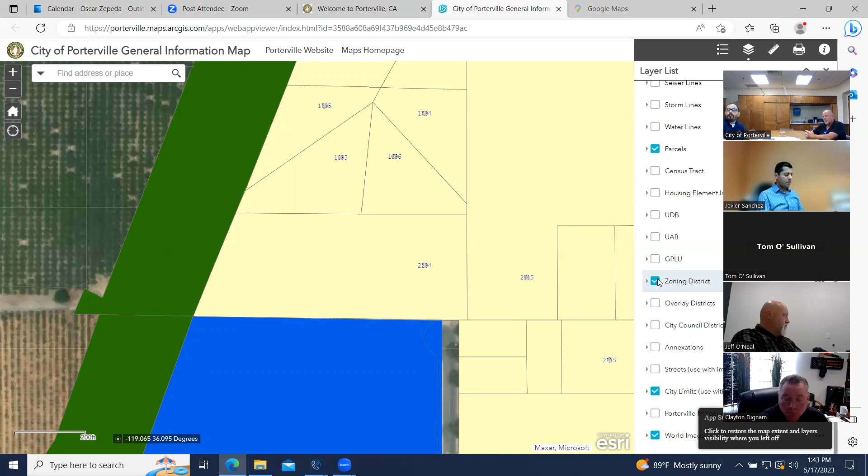It is our understanding that there's been a parcel map approved for the property through the County of Tulare, which subdivided the existing 4.87 acre property into 4 total parcels. The property is within our urban development boundary and is adjacent to the city limits to the south. We have the property pre-zoned as RS1, our very low density residential zoning, with a general plan land use of low density residential.

As far as the process for city municipal services, the city does have an application for that. To receive those services, the property would have to go through an annexation application, as outlined in the city's policy and procedures established under resolution 74-2014 and 75-2014, and amended under resolution 19-2016. Such connection cannot be made unless the city authorizes an annexation and/or processes an extraterritorial service agreement pursuant to the city's annexation and municipal services policies. All water services connections shall comply with all applicable codes.

As far as the annexation area, if you were to proceed, we did reach out to Tulare County LAFCO and received support to include just the subject site of that project area. As far as fees associated with annexations, it will be considered a minor annexation. The fee for the city's process is $1,835, and of course there's also LAFCO's process, which has its own associated fees.

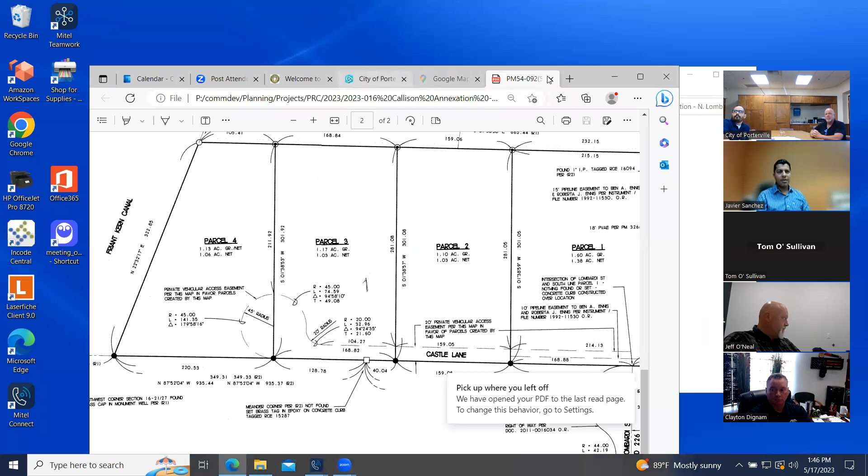Sewer is also available closer to the south end of the school, and that would need to be extended to serve those properties. Because of the parcel sizes and potential units that can be built, in addition to talks with fire and refuse about emergency and refuse vehicle access, we would need a wider vehicular access than shown on that map. In essence, it would need to be a city standard street, which requires a 56-foot wide right of way.

And those improvements that go with it, so curb, gutter, sidewalk, street lights, and those can be developed as each building permit is pulled, except that turning radius, if they're not done close together, that bulb may have to be redone a few times if they develop in order, let's say parcel 2, then parcel 3, then parcel 4. But the improvements could be done all at once as well, so we can just see how that phasing goes. But other than that, that's what engineering has on this project.

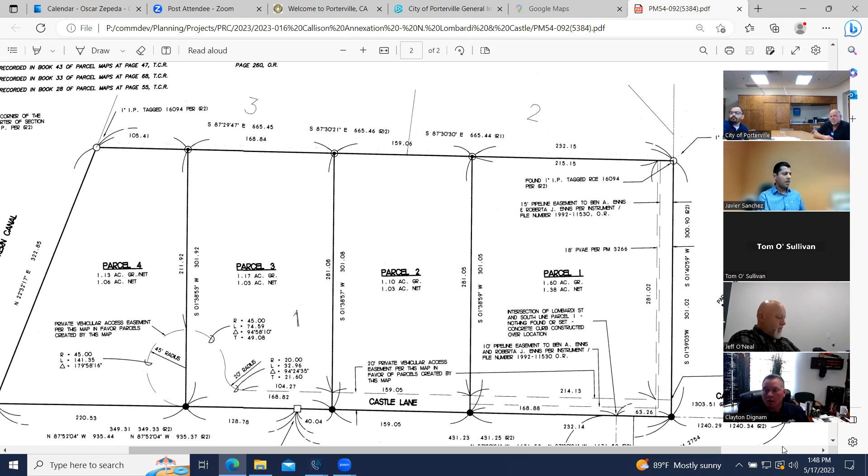Next with the fire department, with Fire Marshal Clayton. Just mirroring what Javier said as far as fire department access. Again, the fire department really has no comment for the annexation portion of this or connection to the city services. It's basically that we will be reviewing these as they are developed and the requirements at that time, depending upon what fire code is adopted.

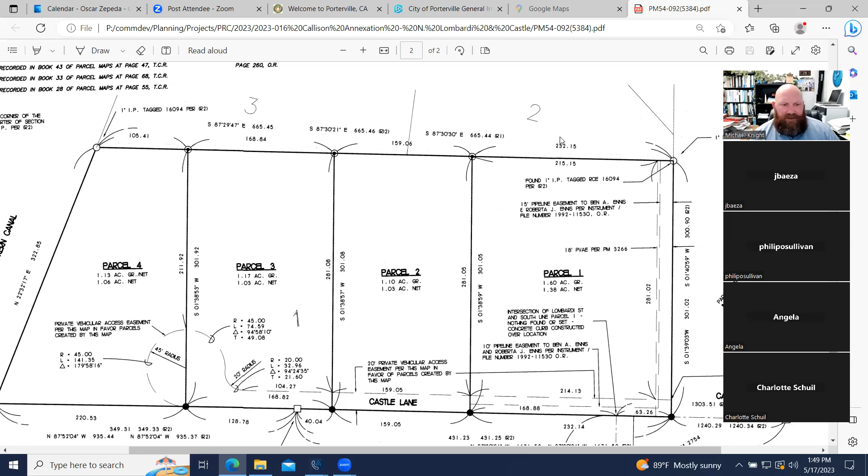No comments this time, no objections to the annexation or the service. Just we would review the connection point and service lines extended to the service addresses, and then continue to review the development of access for refuse vehicles.

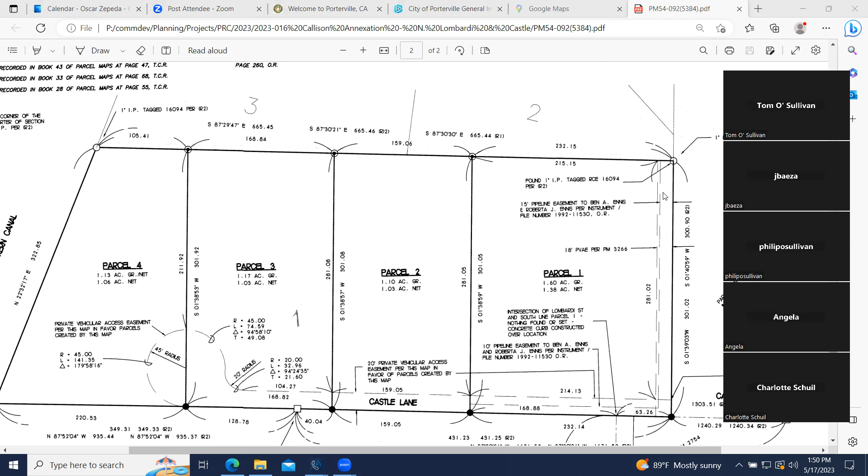I mean, really we want the county, right? You didn't want to get annexed into the city? No, we don't want to be annexed in. We just want to be able to put the wells in. That's our biggest thing. It's already got an existing well there, and everything outside of that, including the houses right behind it, are all county. So we just want to be able to put three additional wells in on the property.

On each lot, each new lot, yeah.

I guess I could speak to that a little bit, if you're asking for a response, I see the blank stare. So I would just acknowledge, as the permit comes over from the county, in this request, the city would not issue a will-not-serve letter. The city would be willing to serve, contingent on meeting the project requirements.

Couldn't quite hear him. Yeah. I'm not gonna give you a will-not-serve. My hearing is not the best as it is. But that—you want to repeat that, Mike? Yeah, no problem, I didn't realize the speaker had died in the room.

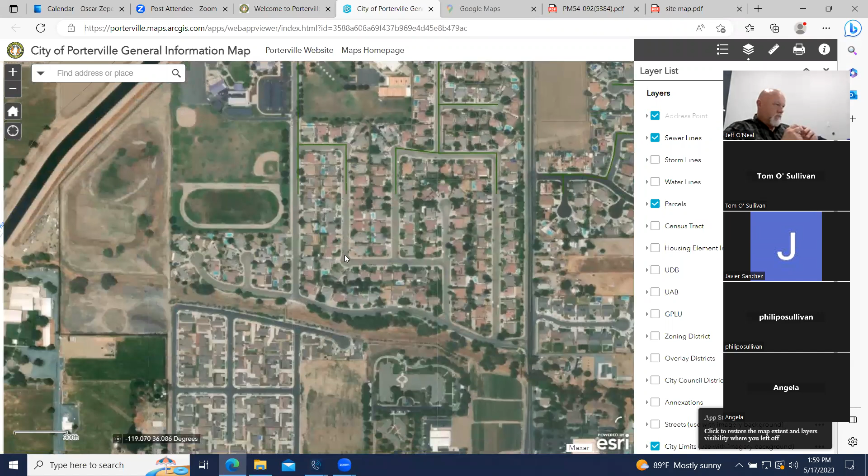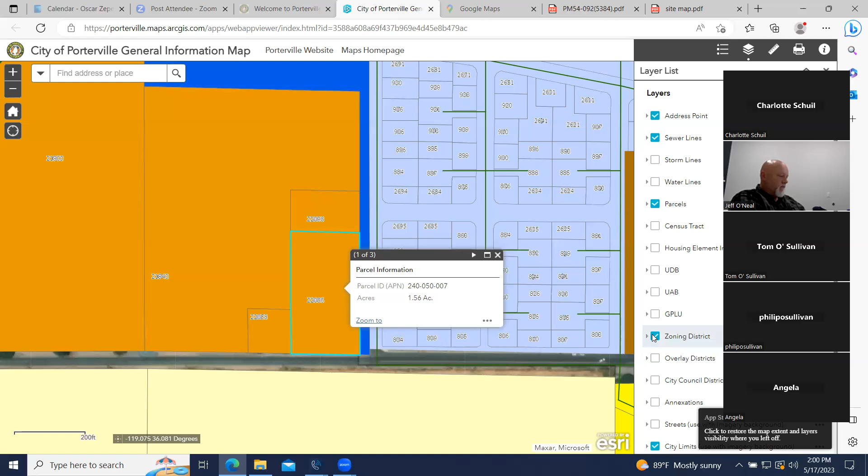Okay, I'll start with planning's comments. Similar situation here as the previous project - the property is outside city limits but within the city's urban development boundary, located at 22086 Avenue 160. The applicant is requesting the process and procedures for annexation of the property for future development of a community water fill station. The subject site's pre-zone designation is medium density residential, and it has a general plan land use of commercial zoning, specifically neighborhood commercial.

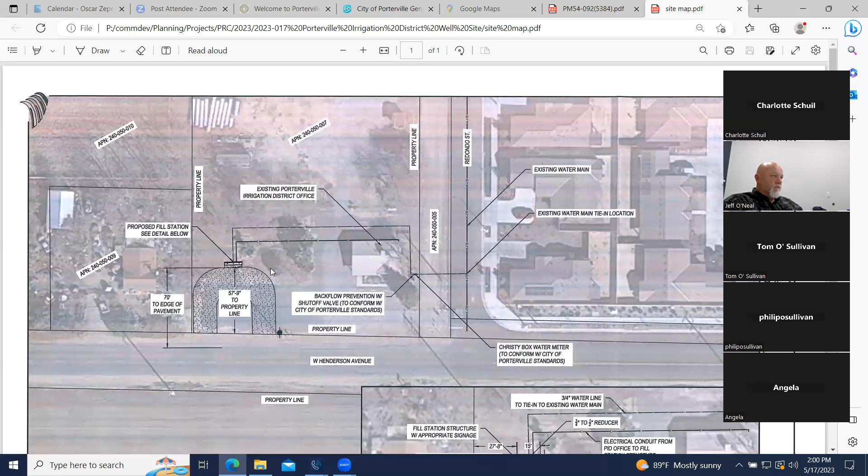Similar comments here as far as the city's process and procedures. Any request for city municipal services would have to process an annexation application as referenced in the city's procedures established under Resolution 74-2014 and 75-2014, later amended by Resolution 19-2016. Such connections cannot be made unless City Council authorizes an annexation or an extraterritorial service agreement pursuant to the city's annexation and municipal service policies. All water service connections shall comply with applicable codes. As far as the annexation area, we did get support from LAFCO to process just the subject site.

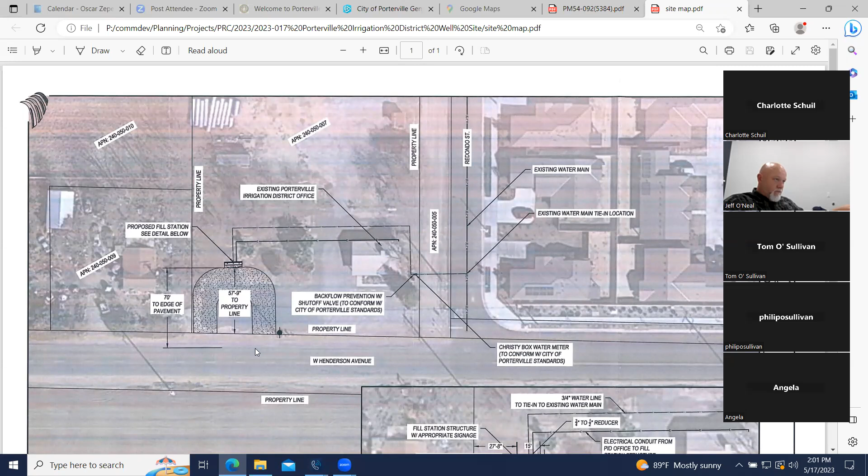As far as the development there, the proposed driveway for access to the fill station is being proposed as DG. Under the Porterville Development Ordinance, section 30410D, surfacing for non-residential development does require that parking aisles and access drives used on a daily basis shall be asphalt, concrete, or concrete paving.

As far as the process, it will require, as stated, an annexation, and of course a zone change, in which staff could speak with our zoning administrator as far as outlining those fees for the applicant. The use would fall under a utilities minor, which is a permitted use under the neighborhood commercial zone district. It will also require an environmental review of the project, in which our environmental consultant would review the project and make that determination.

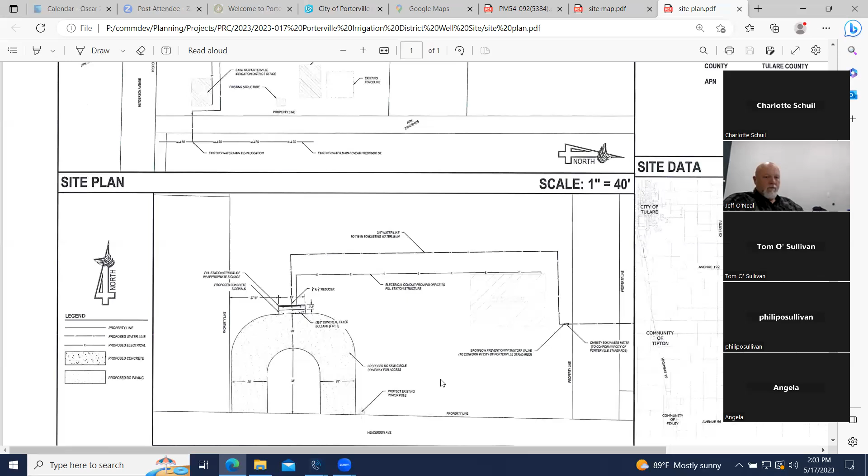And that's all the preliminary comments from planning, unless there's something that our city planner would like to add. No? Well said. Thank you, Jeff. With that, we'll move it along here with our team, starting with Michael Knight.

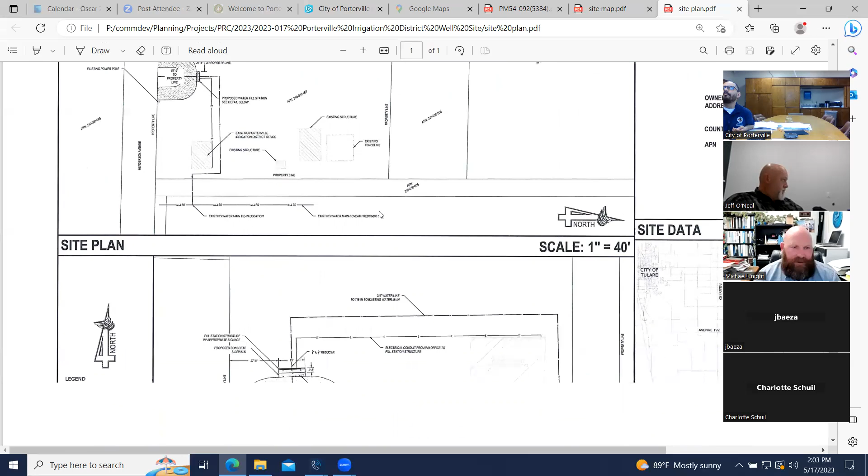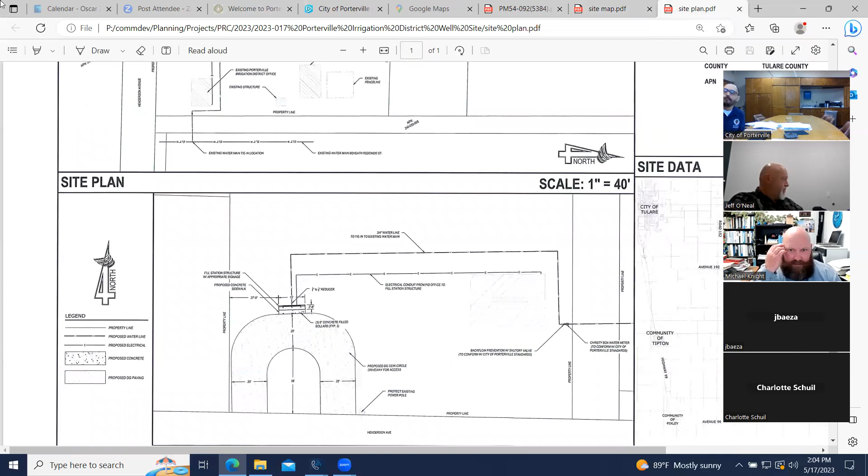Just from the engineering side, Charlotte, the only comments I've received from Javier, who had to step away to another meeting, was the need for an irrevocable right for easement. So there's an easement that will need to be provided for the extension of Henderson Avenue at a later date for that project. As you can see in the aerial, the right of way for Henderson is going to encroach on the property a little bit. So one recommendation is to move the filling station back as well to maintain that easement for future development.

And then no comments other than the backflow device for the service, and we've kind of internally talked about that with staff there at Four Creeks. And that's all the comments I had for it. Thank you, Michael.

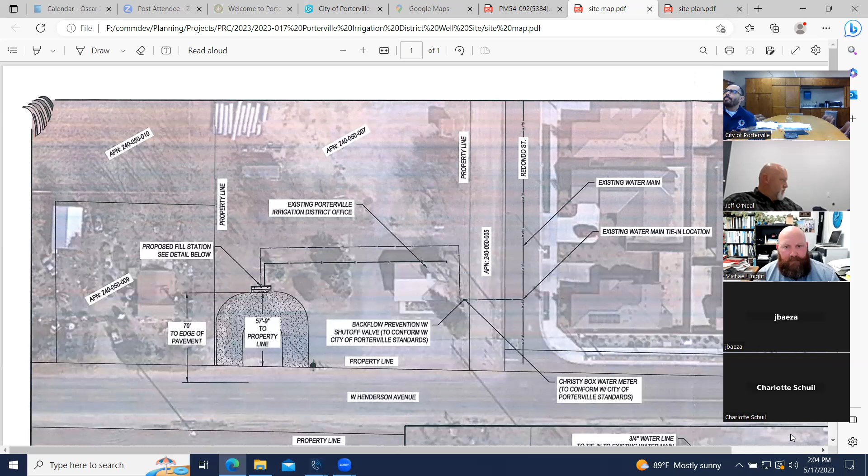Next, with fire department, with Clayton. So is this like the equivalent of water drops or the water filling stations that we see with ice and water? Is it gonna be a structure?

It's less than that, Clayton. It's more like a table with a tap, so somebody can bring their igloo and fill it up, or a 5-gallon jug, at no cost. Okay, so there's no building or structure associated with it?

It would be, and I don't mean to speak for you, Charlotte, but just from the conversations we've had internally, it would be like two posts on each side with a shade structure over the top, maybe an 8x8 or something like that, to keep the sun off the stainless steel.

My only concern is that this is the time when they make improvements for us to extend utilities to underserved areas. Because this is a commercial application on a property currently being used for commercial, not residential, even though the zoning allows it, it would typically trigger for me to require a fire hydrant at the 300-foot spacing requirement, because their west property boundary is beyond 300 feet from the existing hydrant on Henderson.

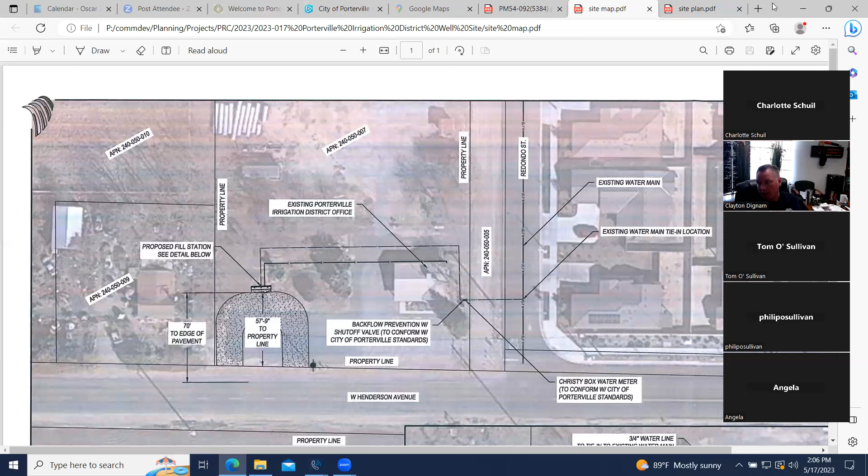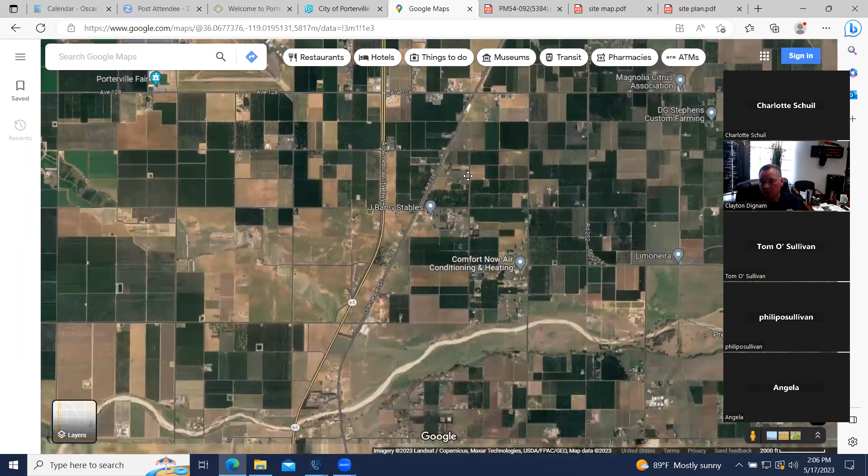So, but if there's no structure necessarily, then I wouldn't trigger that. I was under the impression that it was going to be one of those small buildings. Are you gonna go to the aerial footage in Terra Bella? Yeah. It's right on the curve, north, right there.

Technically, that's a structure. It's more than 120 square feet, or less. I wouldn't say that would be 10 foot by... it may be 10 foot long, but I don't think it's 10 foot out, because a 2x4 or 2x6 normally wouldn't span that far.

Okay, as long as it's not triggering a building permit for the structure, then I'm not gonna require a fire hydrant. Okay, so yeah, I have a better understanding now. I had something completely different envisioned in my head. Yeah, if that's the case, then there's not gonna be anything from fire.